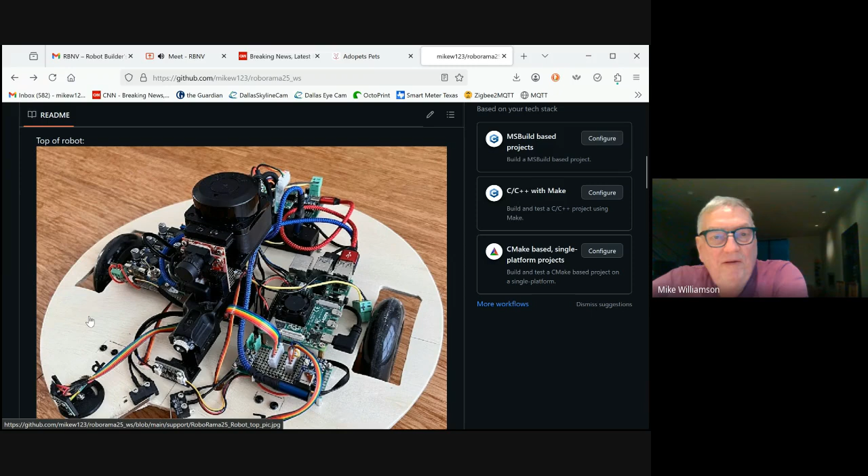Here's a power supply module, and this is the Pi, and then the wheel controllers back there, and the sensor controllers here, and then I got a camera and a LiDAR. I plugged those into a powered hub, which gets powered by the power supply, so it loads the Pi.

Then I got my laser pointer to be able to see what's pointed to something straight ahead of me. So for testing, I put a can right there and test it out.

I have tucked away under the bottom here an IMU, and then I have my current sensor here, battery sensor - voltage and current - and I have a single point range detector. It's a VL53L4, and it just sees what's in front.

Right here I have the two sensors - they're both 45 degree sensors on here, which are 8x8 each. I mounted them 45 degrees relative to each other, so it becomes a 90-degree sensor. I got one on both sides, and they point out, so it gives me a really good range for low-level obstacle detection. The range right here is taller than the cans, so it's going to be for localization, and then these are going to be for obstacle detection and to help maneuver into a can.

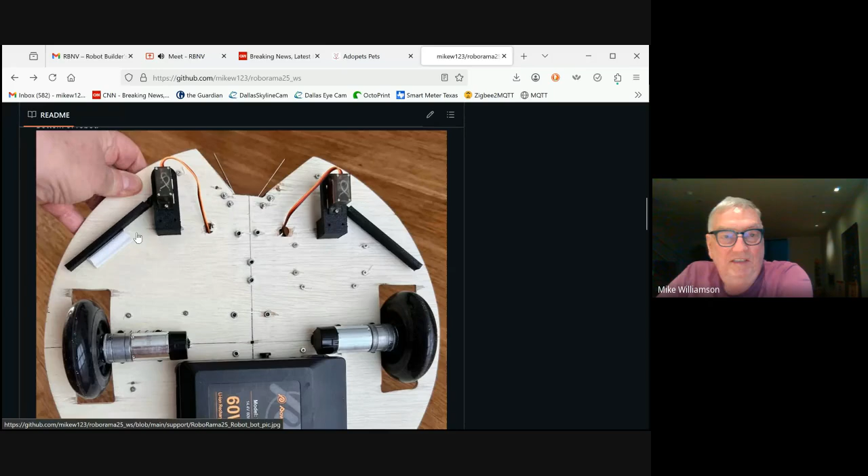And then the can - this is the limit switches to know when the can's been grabbed. And of course you can see the wheels. The bottom here is the servos, and then these are my grippers - they close and pull the can into the limit switches, into that notch there. And then I have the motors and the wheels, and then the battery and a caster. So that's basically my hardware design.

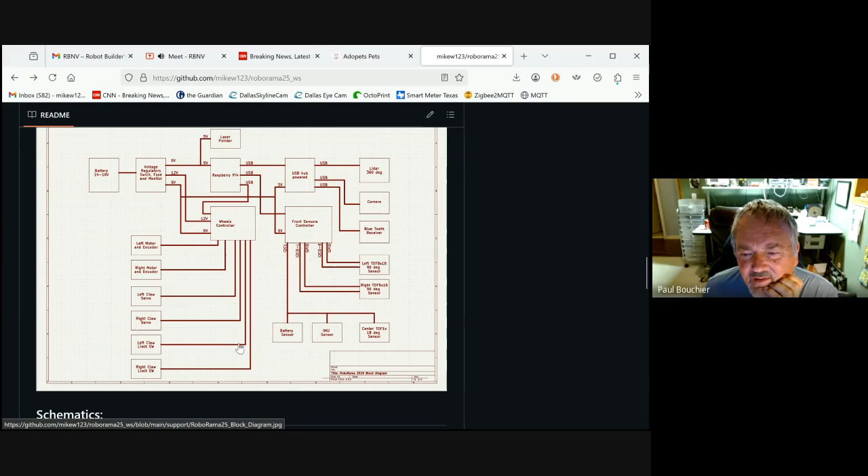I've shown it before, but this is nice pictures, and it's in a document. Oh, nice. And then this is like a schematic of the electronics - a block diagram.

Where's the Arduino in this diagram, Mike? Oh, the wheel controller and the sensor controller - it's an RP2040, but I use Arduino IDE to program them, so their code's stored under Arduino. So there's two of them, the front sensors controller and the wheel controller? Right, yeah, that's this controller here - it's that little module underneath that wire, you can't hardly see it. It's a Waveshare RP2040, which is tiny.

So basically here's the power comes in from the battery. It's about 14 to 15 volts. And then the voltage regulator brings it down to 12 volts to run the motors on the wheel controller.

And then a separate 5 volt regulator output for the Raspberry Pi. I put the laser pointer on there too. These are like USB-C connectors coming out for power. That one had a USB-C for power, and this one had a USB-C for power.

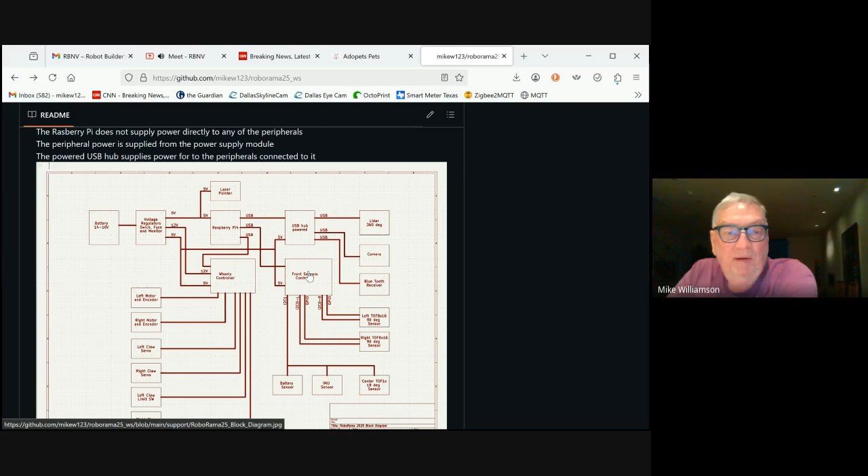You do a nice job of your documentation, Mike.

So these are the things that hook up to the wheel controller: the left and right motor, the left and right claw, and the left and right limit switch. And then the sensors: there's the left 90-degree 8x16 sensor and the right one, and then the center sensor, which has only an 18-degree spread, and then an IMU and the battery. So that's what I was talking about before.

And then this was a schematic for the power supply board. So basically the power comes in, a switch and a fuse.

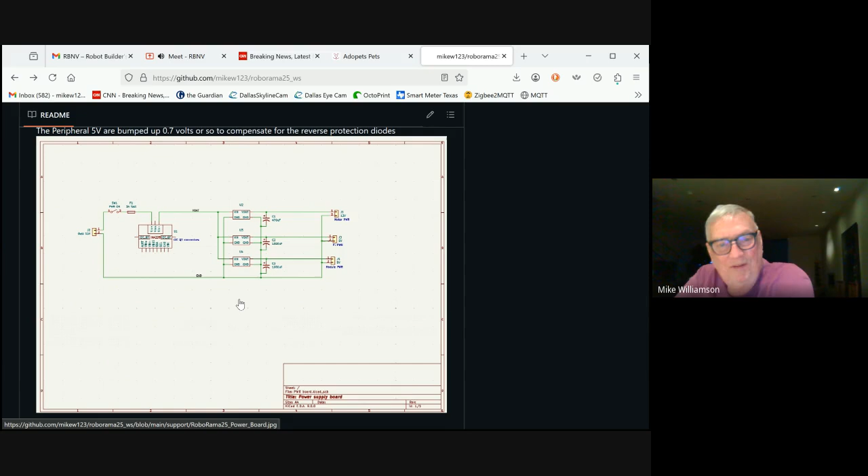It has a current and voltage sensor, and then it goes to the 3 regulators, and then I put more capacitors on the output of them, and then I put them on 3 connectors. So it's a pretty simple board, but because the regulators are big, it's a big board. You can see at the beginning that it's about the size of a Pi or something on this side.

And then this is the sensor controller board. And what I have it sort of described up here.

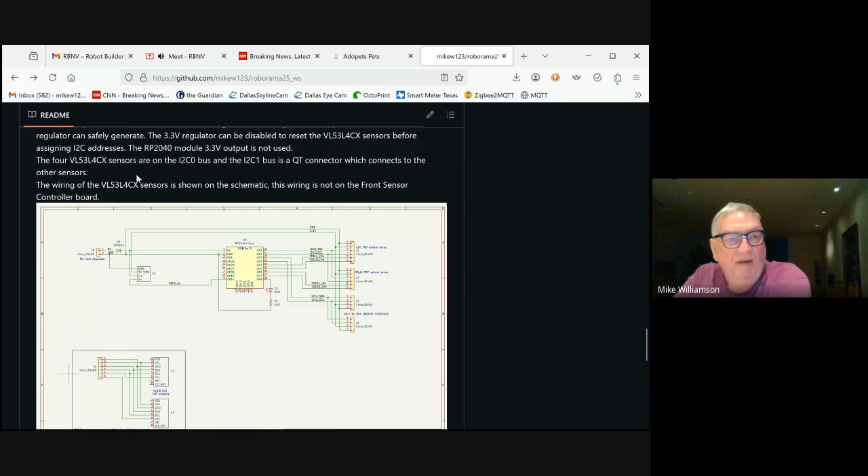It's the RP2040, and the 5 volt comes in, gets reverse voltage protected, so that the 5 volt from the USB cable doesn't feed into the other modules and stuff. It's pretty important to do that.

And then I have a 3.3 volt regulator on here because these sensors take a lot of power, so I couldn't use the 3.3 volt output of the RP2040 board. And so this one powers all the sensors. So it's good. And then this is just the connection to the connectors.

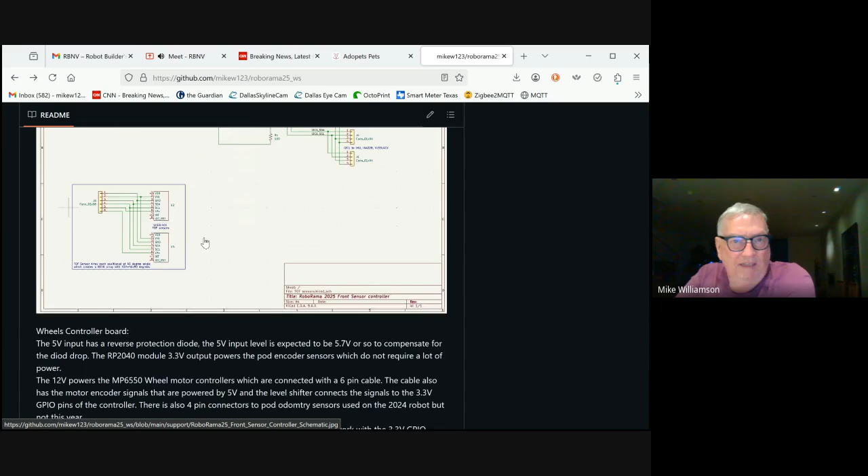And then this is the wiring harness that goes to the 2 left and right sensors. And since they come up default with the same I2C address, there's a... I'm not sure if I can pull this up or not, but there's a... it's not letting me blow it up very well.

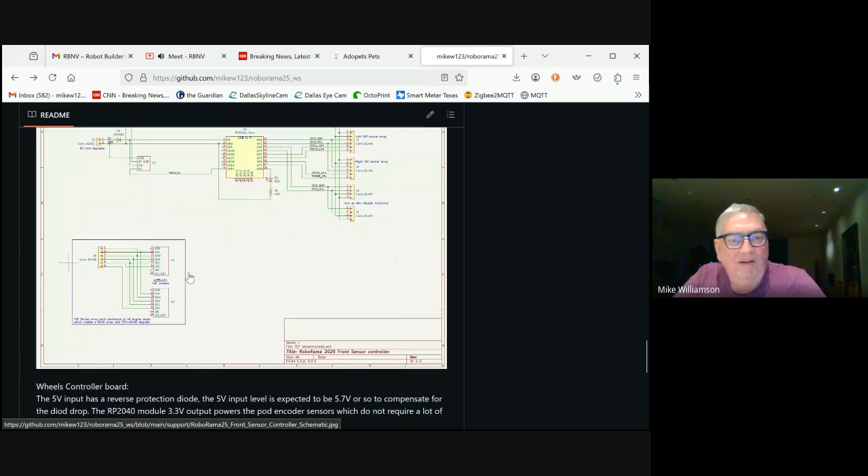Okay, so there's an enable for each of the 2 boards. So when it comes up, all the boards are disabled, and the power supply regulator here gets shut off and shut back on, and that resets the internal sensors to their default I2C address, and then I cycle them up one at a time to set their particular addresses based on that wire.

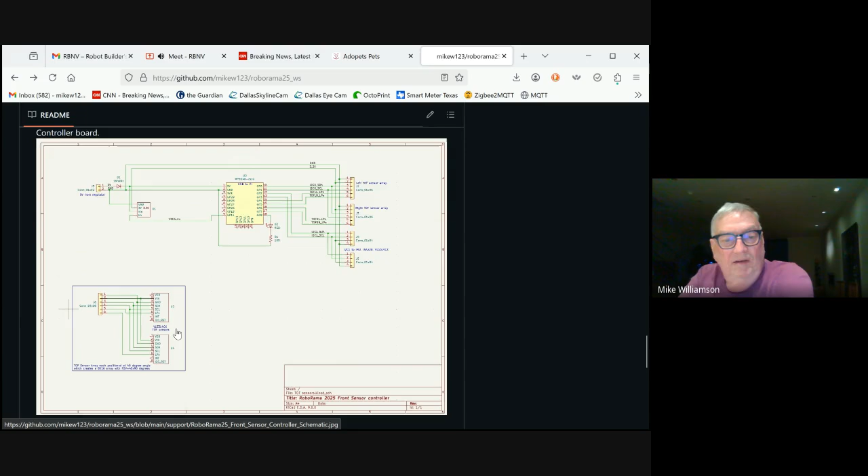And then this is the wheel controller. So basically it has the RP2040, it has 2 motor drivers, and then it has a level converter.

And the level converter was because the encoders on the wheels really didn't want to get down to 3.3 volts. They say they'll work, but I didn't trust them. So I ran them at 5 volts and did a level conversion to get really nice, clean, sharp edges out of them.

Yeah, and then the RP2040 has the PIOs on them, so they make really good pulse width modulation for driving the motors, PWMs, and then they have some really good code for those PIO modules to do the PWM driving of the servos also. And the PIOs also have good detectors on them for doing the quadrature detection. So all that's run in hardware on the RP2040.

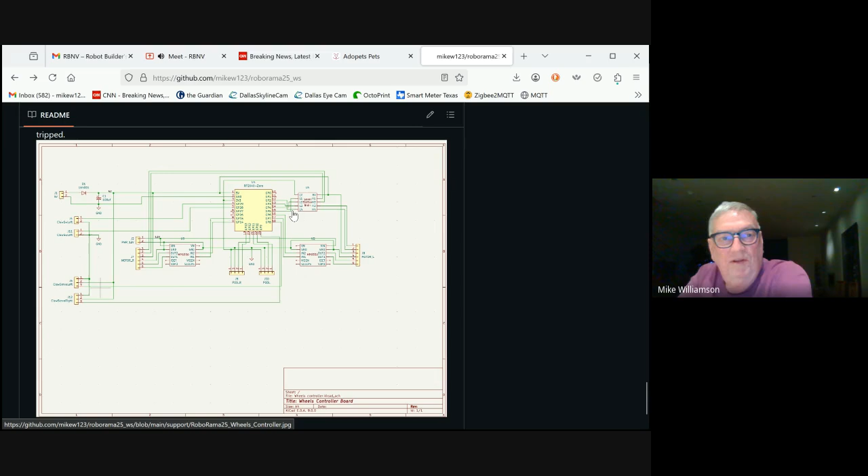That's a good idea, so that's pretty good. So that's my README file. Need to add more information to it and keep it up to date.

Is there anything on this README file of interest, or?

Just Mike, one question. I notice you have a separate Bluetooth transceiver. Is that correct? The receiver, that's for the game controller.

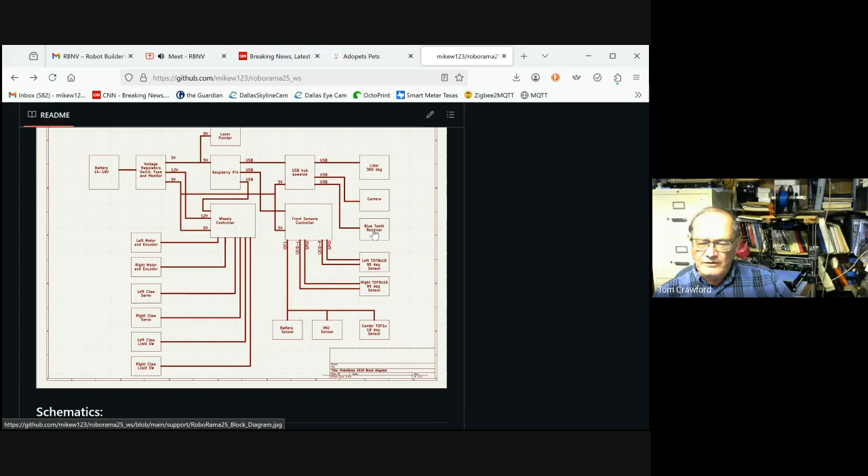So for the joystick, does your Raspberry Pi 4 support Bluetooth, and why did you choose not to use it? The game controller came with a little dongle to plug in, so I just used it.

Okay, so you had it, so you used it. Yeah, got it. That way I didn't have to program it or anything, so I just plug it in and it's happy.

And then the ROS Joy module knows about it, and it can decode it and send information to the ROS system for teleop.

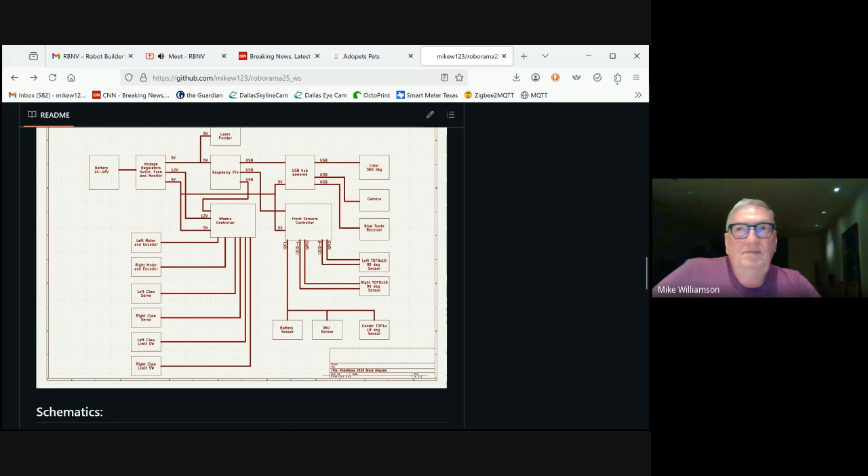Right now my robot's down in another room. Today I moved to another room because I was building the course to do debugging and testing in a room I'm not using, and I'm realizing it doesn't have good Wi-Fi, so I've got to figure out how to fix that. It's pretty unreliable between the Linux development machine and the robot, the Pi Wi-Fi on the Pi. One end of the room it's okay, the other end it's just not good at all.

Once I got my LiDAR running, I was visualizing it in RViz, but right now it's not working that good because of the Wi-Fi issues, I think. I was noticing that in RViz the LiDAR was being flaky. All the messages were coming out, but it would say it can't transform it, and every once in a while it could transform and stick out a message.

I made a change where the transforms between all the links - I need to put that in the documentation, the ROS structure of the different transforms, from the LiDAR to the base link, to the map, and to the ODOM - I updated the transform rate on those broadcasters to be the same rate as the LiDAR, and RViz seemed to work a lot better.

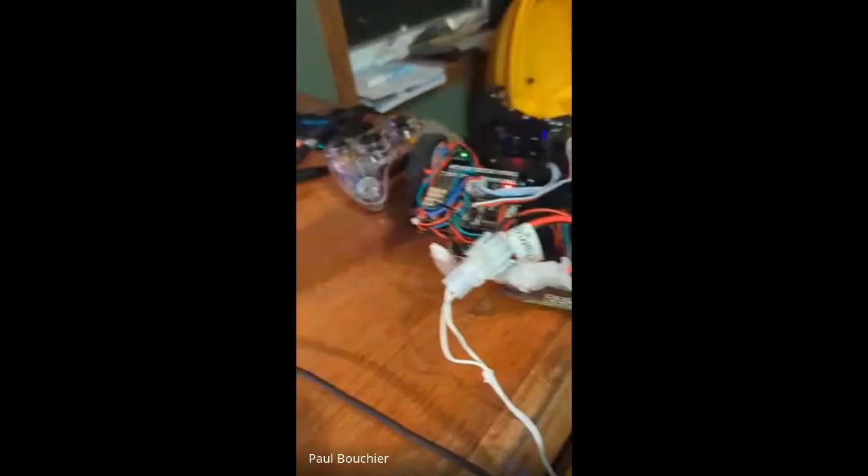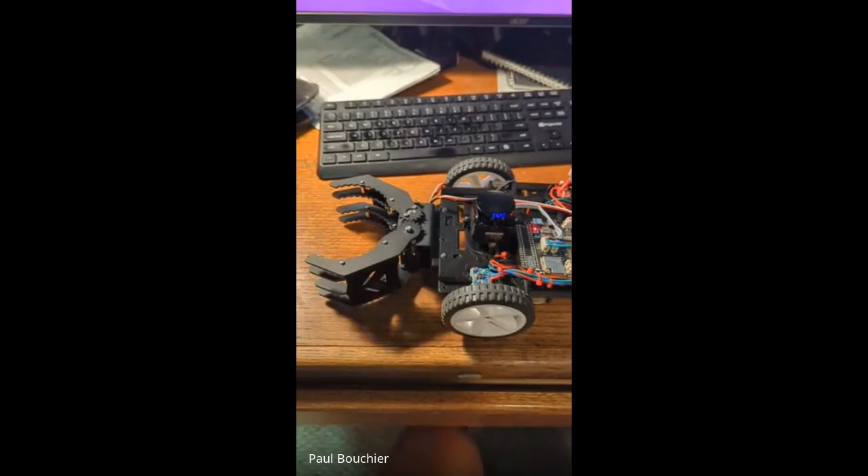You got an echo going again. Yeah, let me see if I can mute this. There we go, mute. Is that better? Still got a bit of an echo, don't I? They're both still on. You want to not mute the phone, but mute the PC camera. Yeah, looks like the camera. Otherwise it won't show up in the recording. Okay, how about that? That sounds better. No, you got to do it the other way around. You want to unmute the phone so it can show up in the recording, and then just mute your PC. Okay, so like that. That's better, okay.

So I modified the linorobot stack to accept a command onto the servo, and so if it issues a publish command - so there's the can grabber.

Operating, and your grabber's fancier than mine. There we go. So is it a can grabber or a can crusher? Well, good question, it's really only a grabber.

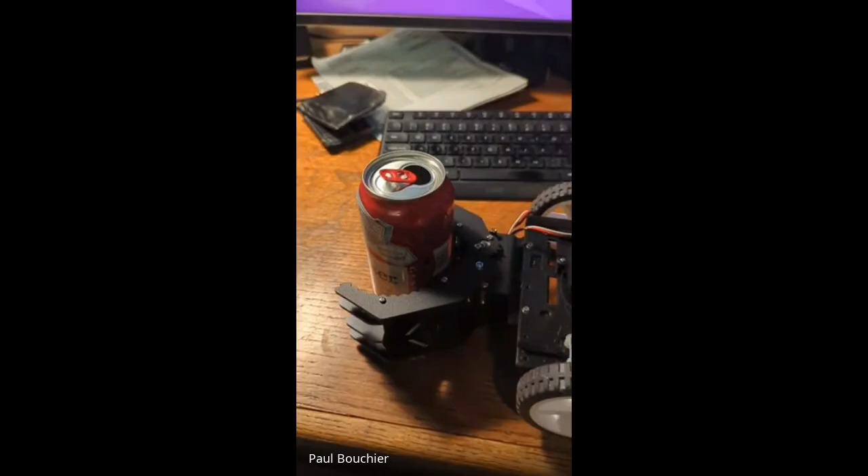Wrong way. Hold my beer, here we go. Maybe a grabber - there, oh there we go. Like a rat trap, it didn't crush it though. It's tight. Yeah, my servos seem to buzz when I grab too hard.

Yes, that's what I was going to say - you should adjust the angle that it closes at, because if you don't, your servos are constantly trying to get there and they'll overheat. Yeah, I noticed on my battery sensor I was drawing an extra 300 milliamps when I had both servos buzzing. Yeah, you don't want to do that. Right, they have to reach goal.

Okay, and then the other thing that I wanted to share - just bring it up and let me put the robot out here. So you got the hallway set up, and okay, I'm going to - hopefully this will come up - come on baby, come to life.

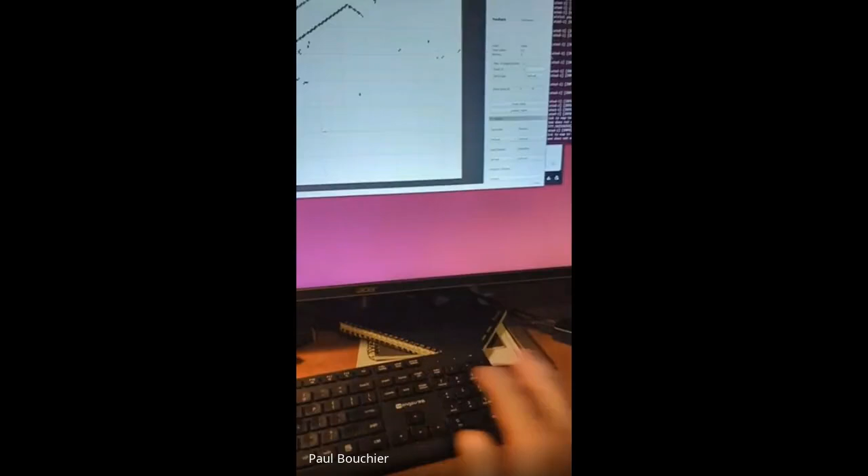Okay, and I'm going to share this window. And you should be seeing the RViz window, and I'll set - you got to give this thing an initial pose estimate, and you can reposition it as you see the need to.

So, looks like it's been wandering all over the house, not just the hallway. These are various points that it picked up when it did a SLAM, when it mapped the hallway using SLAM. So now you guys are seeing the RViz window, right?

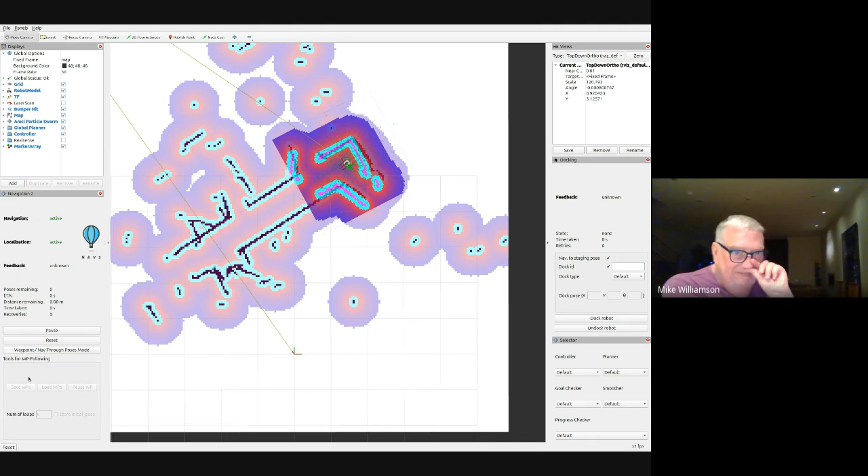So now I'll do waypoint nav through poses, and set a pose - nav to goal down here, pointing back up the hallway in the opposite direction to which it'll come from, and then set a second pose back where it is now, pointing towards where it should go, and then set it to do 2 loops. And if I'm really lucky, this will work. Start waypoint following.

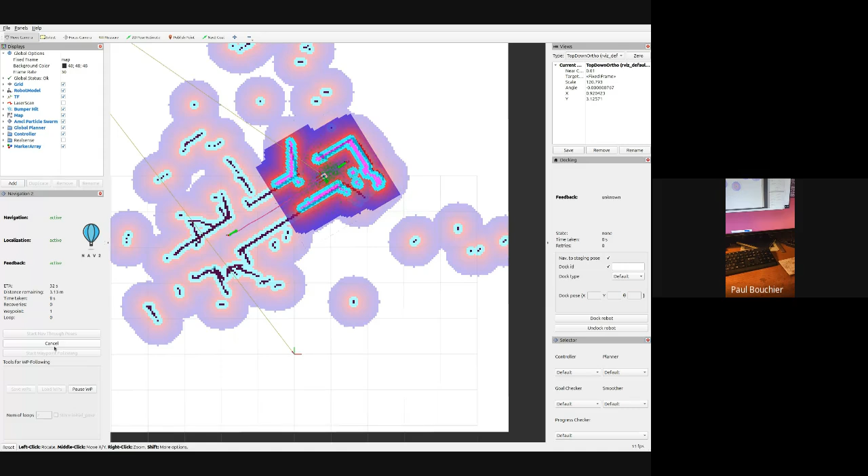And you guys are seeing the robot in the hallway, right? I see it on RViz, but not on your phone. Your phone looks frozen. It's showing your keyboard still. Now we see it, there. Must have been slow to catch up.

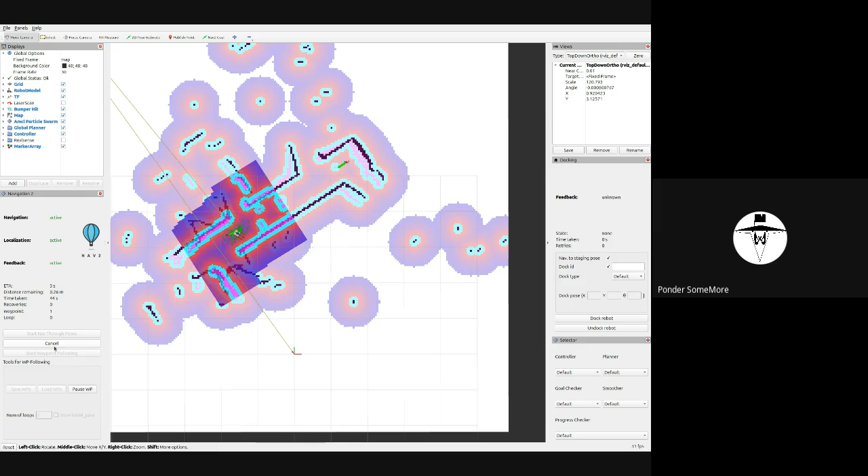Okay, so you're seeing the robot doing a turn now? Yep. And if you look at RViz, you'll see where it is in the map.

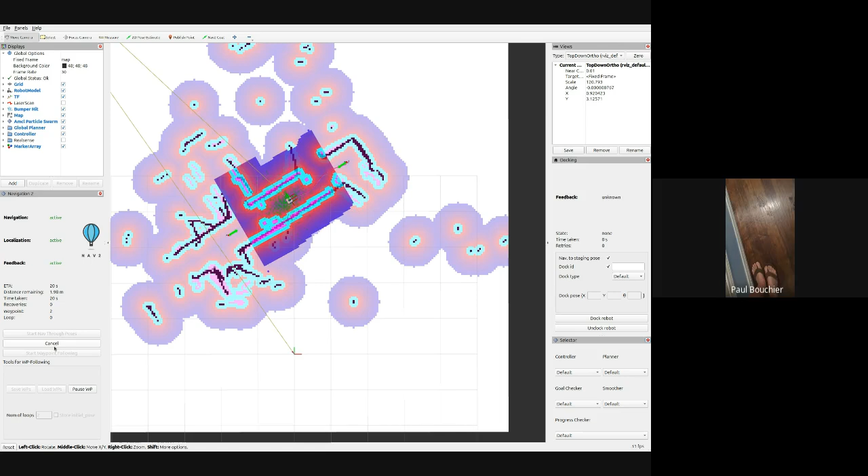So I set up the cans so the path kind of wanders around. I'm just going to stand here, and it should modify the path. The local planner should modify the path to avoid my feet, which it does. You can see it's going around me.

Thought we were going to see a toe crusher. And it's doing its little back up and turn movement.

And you'll see if you look at RViz, you'll see it detect the obstacles. It's not to a point where it's detected the far set of cans yet, but it's getting there. And you'll see the path on RViz change as it figures out a new route.

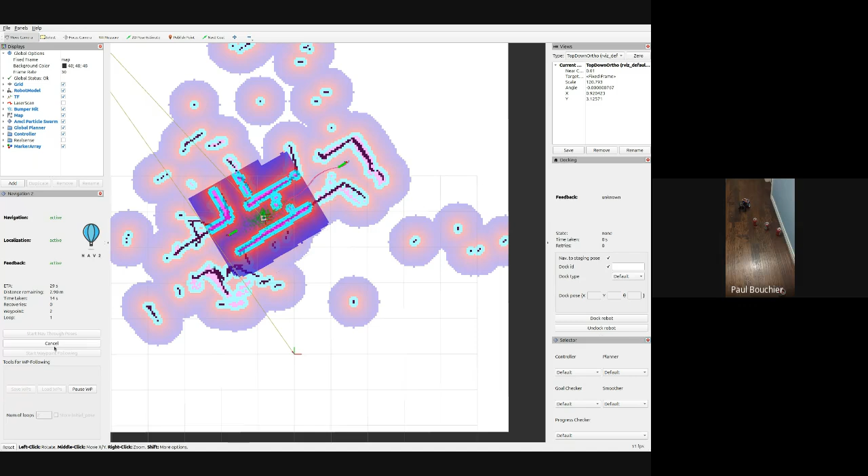So now, what would happen if you made it go like twice as fast? Can you make it go faster? Okay, I'm just moving the cans to give it an obstacle. Now it's replanned around a new can location. I've got the speed turned down because I thought that was maybe causing me grief, but it wasn't.

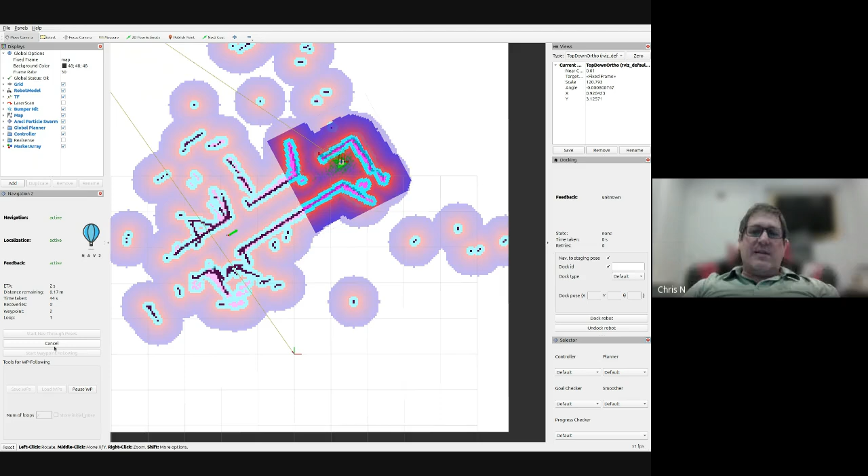It should go faster, but I just haven't gotten around to trying it. The reason I'm asking is last time, I haven't used it on ROS 2, but on ROS 1 with the nav stack, I've always found that I wasn't able to make it go fast. I don't mean really fast, but I wasn't able to make it go faster than that. It always wanted lots of free space. I couldn't tweak it so that it was okay with more narrow passages, those sort of things.

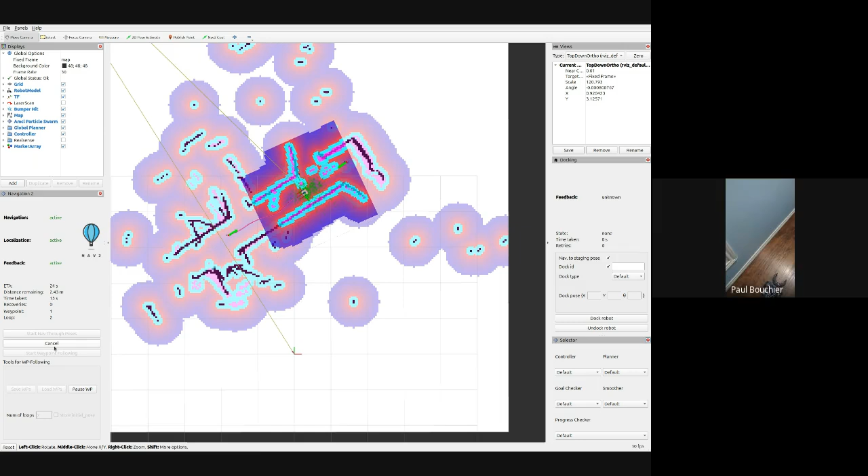So I can see how narrow I can make its passages. It does pretty good, it'll come within a couple of inches. Oh, that's too close. It thinks it's detected a collision now, and it's trying to recover.

Yeah, isn't there a minimum distance for the LiDAR? Like maybe 50 millimeters or so, maybe longer? I wonder if it's running into that as a limitation, if you get things too close, you just can't see it. No, the LiDAR will detect stuff that's right up there.

It seems to have gotten stuck. Claustrophobia, that's what it is. It's pouting. So, thanks for the demo, Chris. All you got to do is kick it.

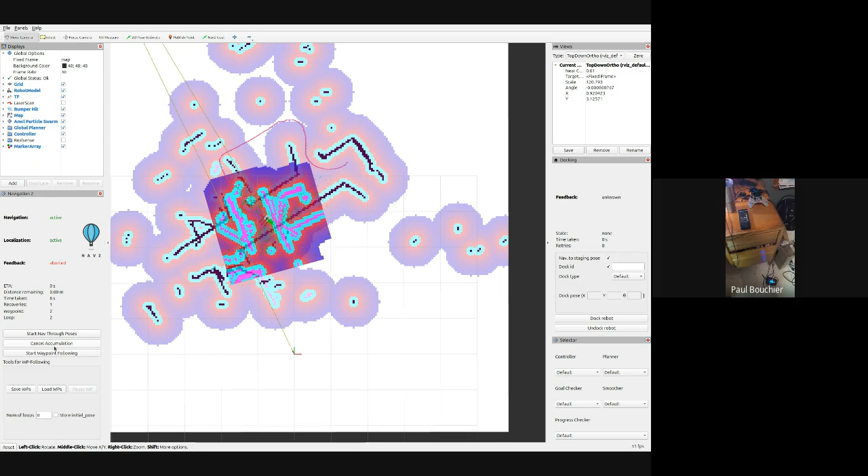Let's see if there's an error message that makes sense. No. Cancel the goal, cancel the goal because it figured it couldn't get through there. Oh, I see what happened. Okay, so at some point it lost localization.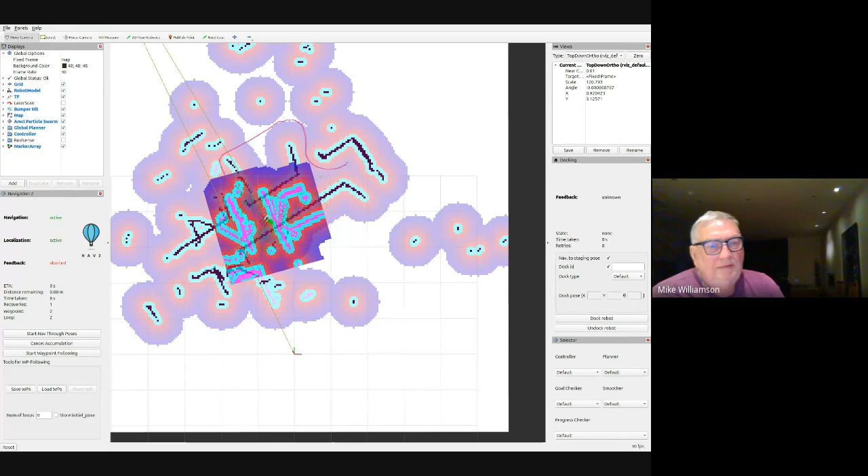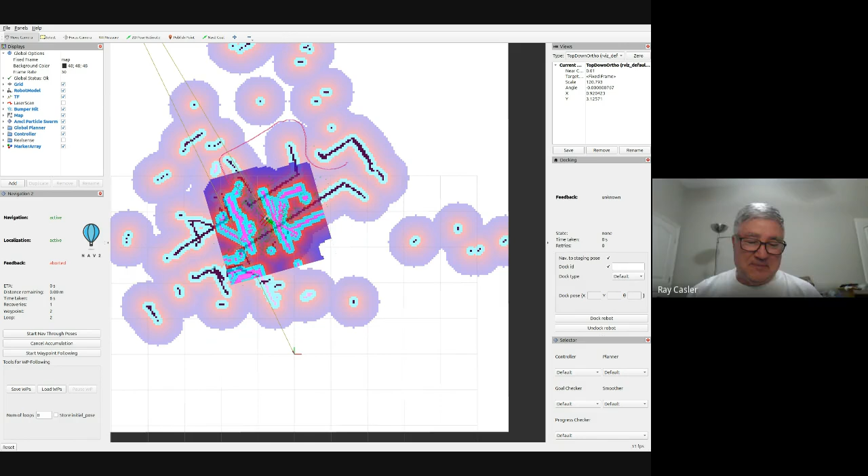Yeah, we can't hear you if you're saying something, Paul. You're still on mute. We can all hum, do do do do. Can you hear me now? Yes. Can you hear me now? Yes, I can hear you. Okay, I think I'm back now.

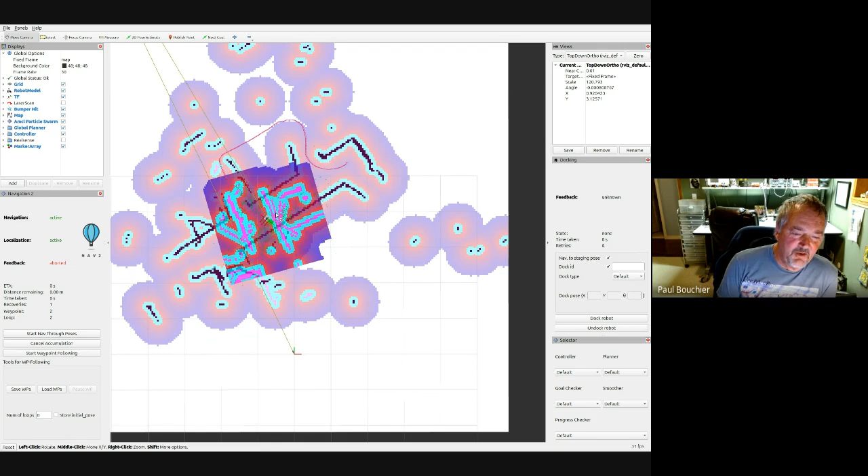Sometimes it does this. Can you see my cursor on the RViz window? Yeah, so you see where there's this line across the hallway. At some point it lost localization, and I've noticed that happen now and then, and I haven't figured out why it happens, but the odometry frame got turned around, rotated relative to the map frame.

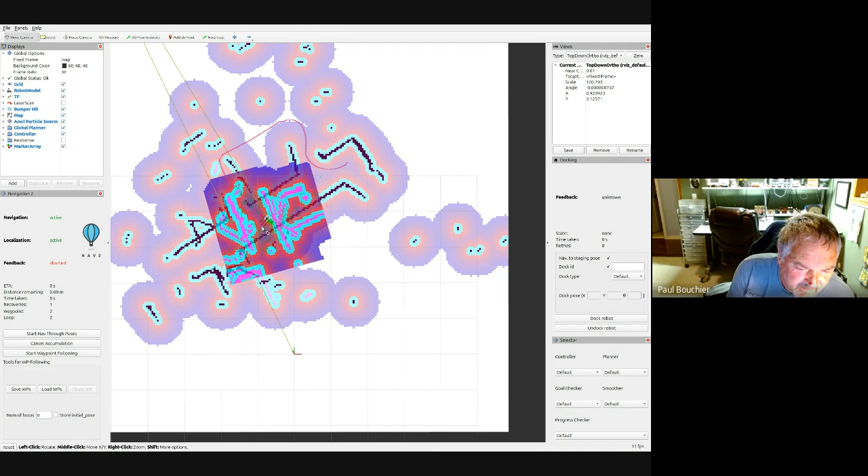So now it thinks the things the LiDAR is picking up look like obstacles placed across the hallway, and it shows that the robot is pointing about downwards and to the left. Is this what Chris was talking about, if it goes too fast? I think this is what Chris is talking about, and it's actually pointing downwards and to the right.

So I can reset the pose estimate, and hopefully that will all come back to what it should be. I'm trying to tell from the LiDAR image when you got it lined up right. There we go, so that should be enough to let it continue. But maybe it's too far gone.

We'll cancel, accumulation, and set a nav2 goal. It's not far from it. There we go, so now it's recovered, and yeah, look at that. That's exactly the problem, and I don't know why it does that.

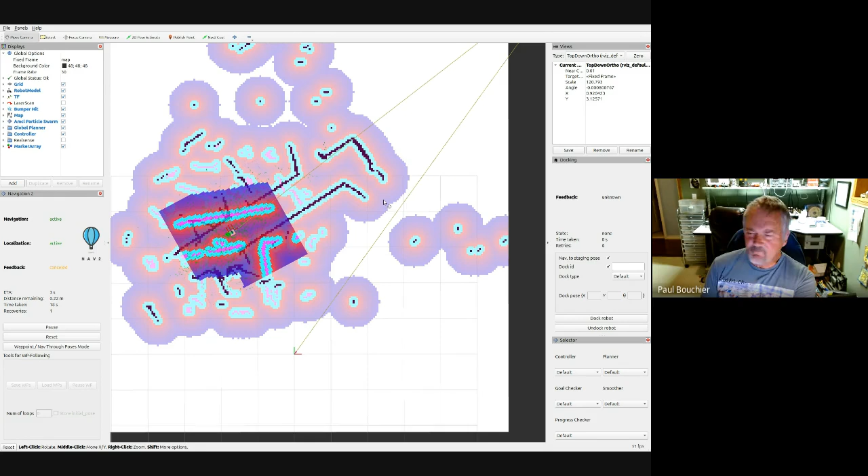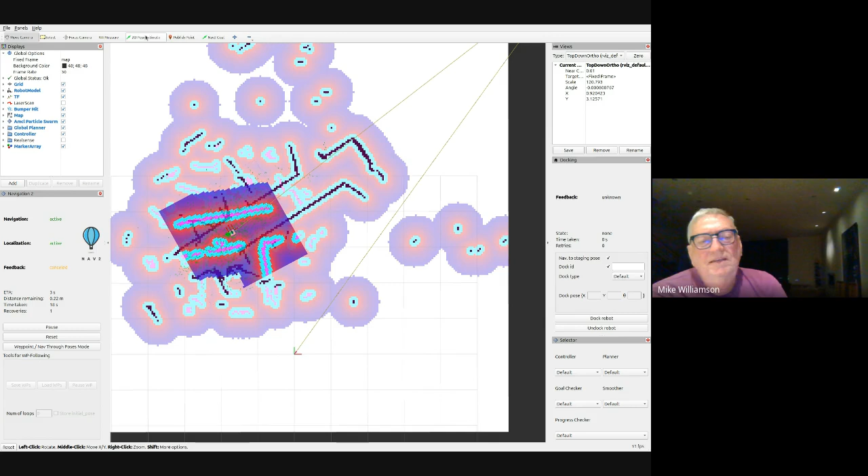I know one of the things that was causing it was I get dropouts on the Wi-Fi between the ESP32 and my laptop. Yeah, Paul's doing the actual heavy lifting on the laptop and not on the robot. So it's actually pointed up in this direction, best I can tell.

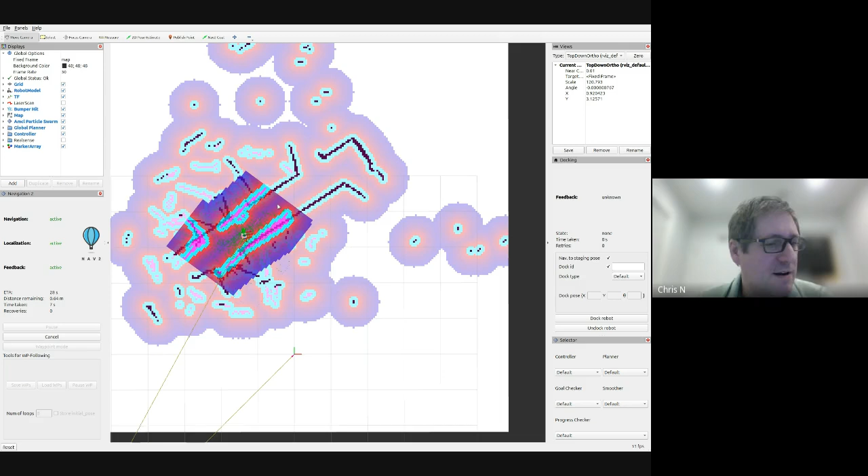How good is your time synchronization between laptop and the robot, Paul? That's a good question, Chris. Mike, before recording started, you were talking about some issues with your LiDAR and RViz. I've run into issues before when I have things going on the robot, like on the Pi, and other stuff going on the laptop, including RViz.

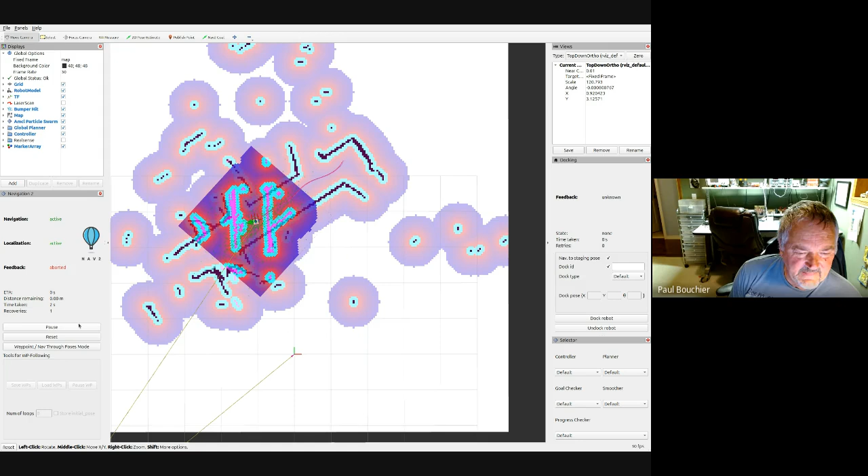If those were not perfectly time synchronized, things just were not happy. I used to get messages like, oh, you can't interpolate into the future and this and that. You had to really be spot on with your time synchronization. Yeah, I was getting those even on the robot itself, not going between two different operating systems. But that was last year.

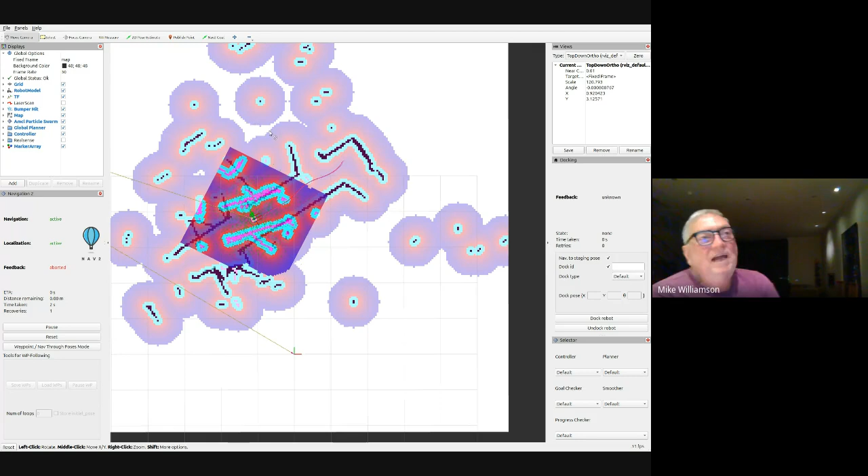This year it's given those issues on RViz. But last year I was trying to do transforms on the robot between stuff, and it would tell me I can't do it. That's when I said, okay, I'm going to not timestamp anything, and then things started working. So everything's zero time. But I want to try to do it right this year with timestamps.

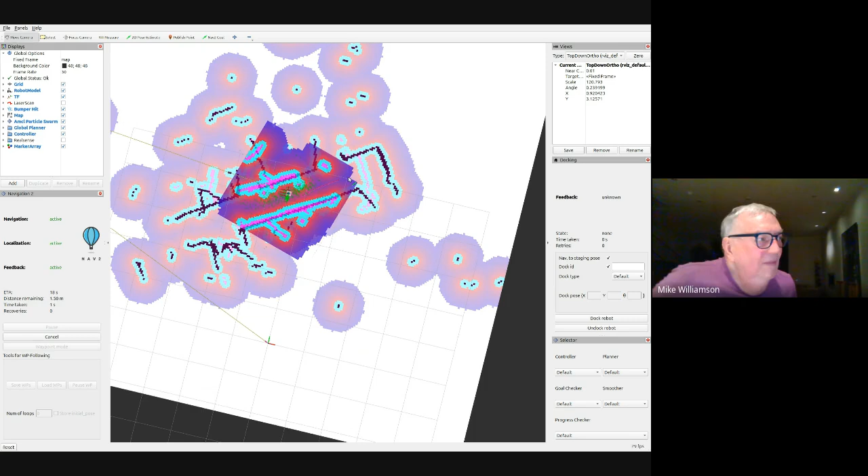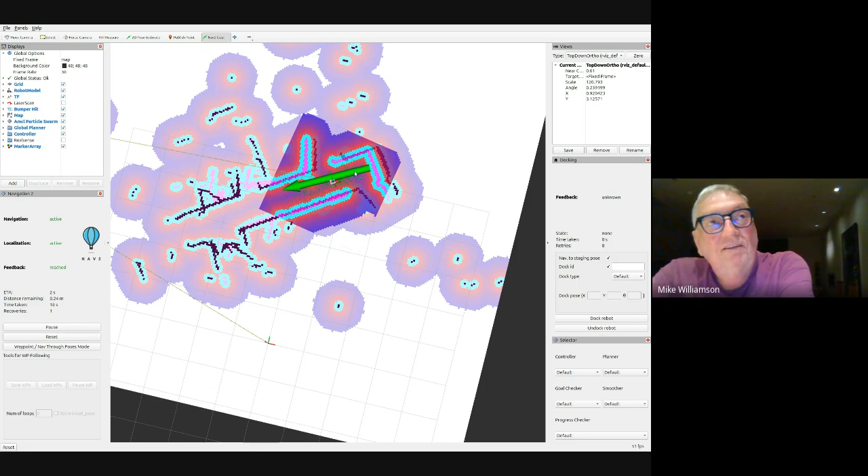Yeah, so last year I cheated. I wasn't using the navigation stack, I was just making my own up. But mine had similar issues with losing localization, even with my own code. That's why I didn't win last year. All three of my chances, it lost localization, went wrong. And then before and after the competition, it kept localization.

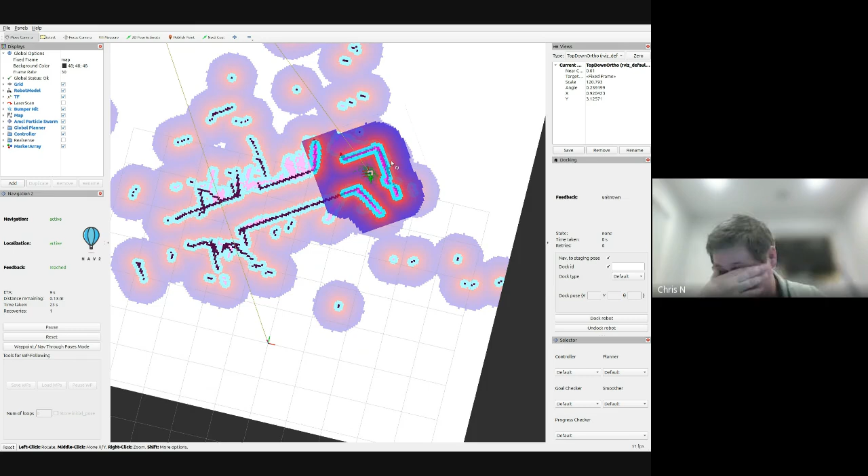And it's like you can see it trying to fix its localization, and then it'll get messed up again. You're asking really good questions, Chris, and I just don't know, haven't played with it enough. That's the thing with ROS, right? How do you troubleshoot this sort of problem? It's such a big black box, you don't really know what's going on inside.

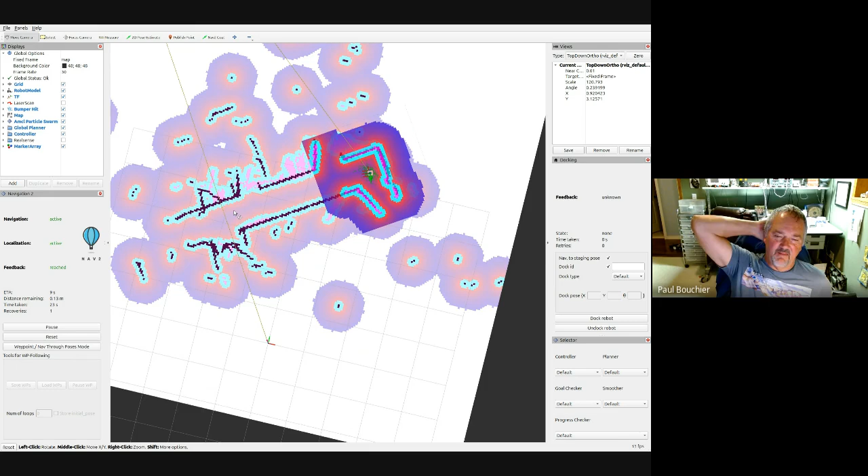Well, I actually found a way to troubleshoot it for one of the causes. What was happening, the Lino robot software on the microcontroller pings the agent on the laptop, and if it missed one ping, it would reset the microcontroller software and restart all the publishers and subscribers. This was happening every minute or two, so if the robot was moving at the time, particularly rotating, suddenly there was a dropout in data from the /odometry topic and also the IMU topic, and the extended Kalman filter would go crazy and produce nutty stuff on the filtered ODOM topic.

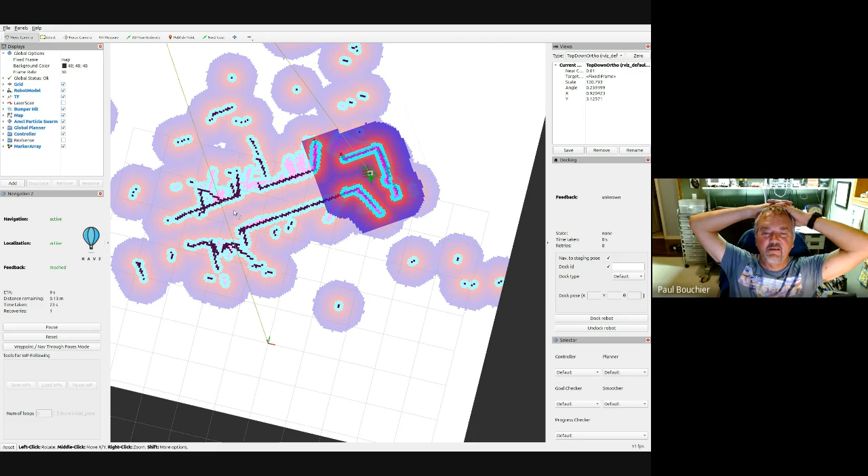Particularly the orientation would go all wonky, and that would cause the transform between map and base link to be all wonky for its rotation, and that caused the LiDAR to go all out of whack. So I found that by recording a bag file and graphing the orientation Z and W quaternion terms, you could see it do a jump.

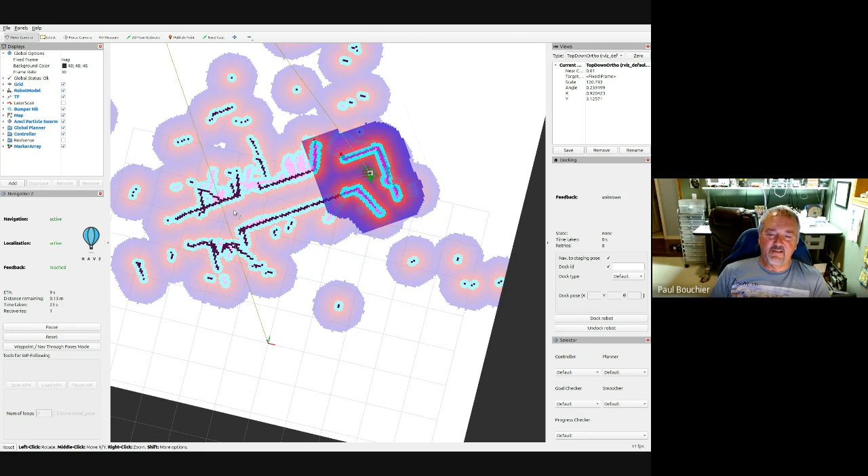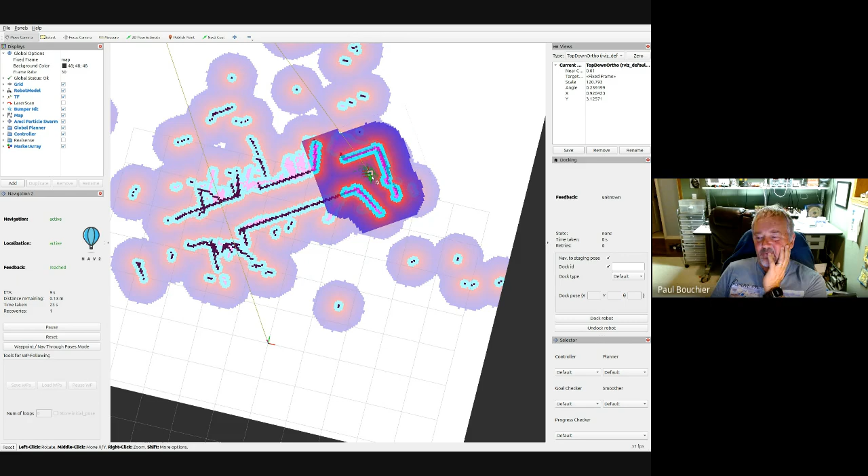And on ROS bag, you could see coincident with that, you could see it stop publishing ODOM. So that told me, hey, ODOM is going through jumps, and that's causing the map to base link transform to go all wonky. So I'm confident - I fixed that by making it more tolerant of lost pings. But I'm not seeing lost pings now, and still occasionally seeing this wonkiness like you just saw. So I don't know what causes that, still more work to be done.

Yeah, we know it can be done because my Roomba works pretty good. Yeah, right, my Roborock Q5 works real good. So yeah, I know it can be done, but I haven't had enough time to tune it up.

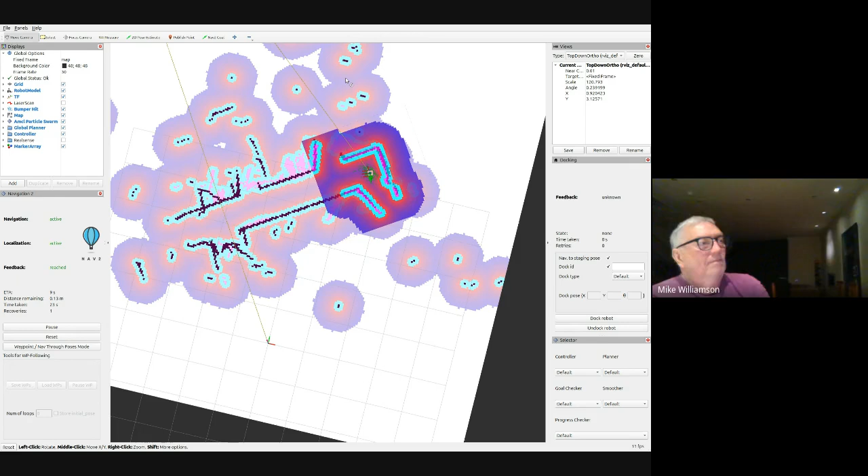So anyway, the talk on Saturday is not really about, well, here's a finished rock solid thing. It's about these are the nav2 concepts involved, and the Linorobot2 architecture, and how you configure it, and you can do this with actually zero programming, because other than the bug fixes that I put in, there was no actual programming needed to do what I just demonstrated. I've been given committer access to Thomas Chu's Linorobot repo, and I've put in a few fixes for things that were broken. So anyway, I reckon Linorobot is pretty good stuff, and that's what I had to show.

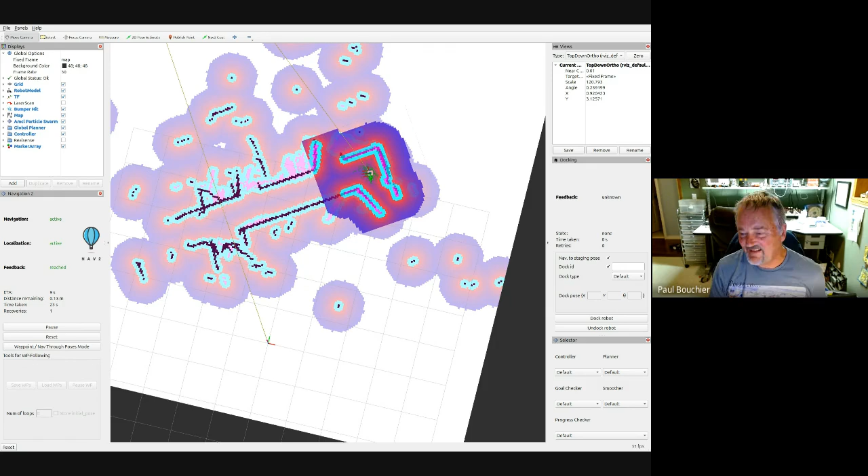You're doing pretty good. Yeah, anybody can get it to run in simulation, but in real life, it's a lot harder.

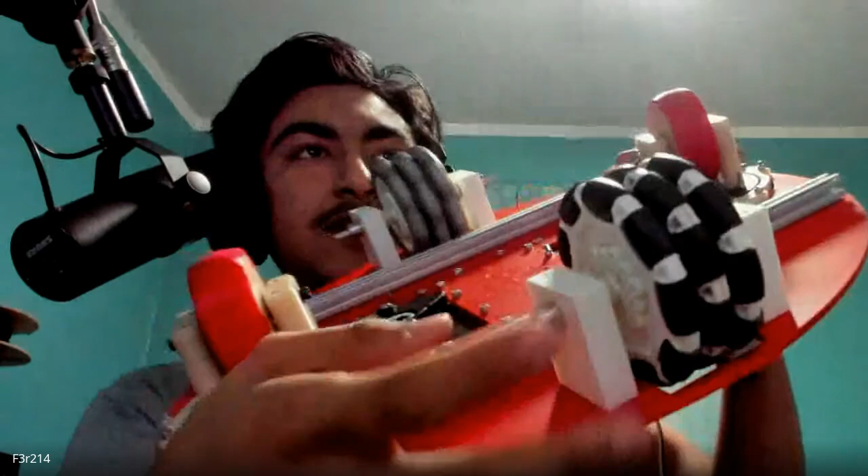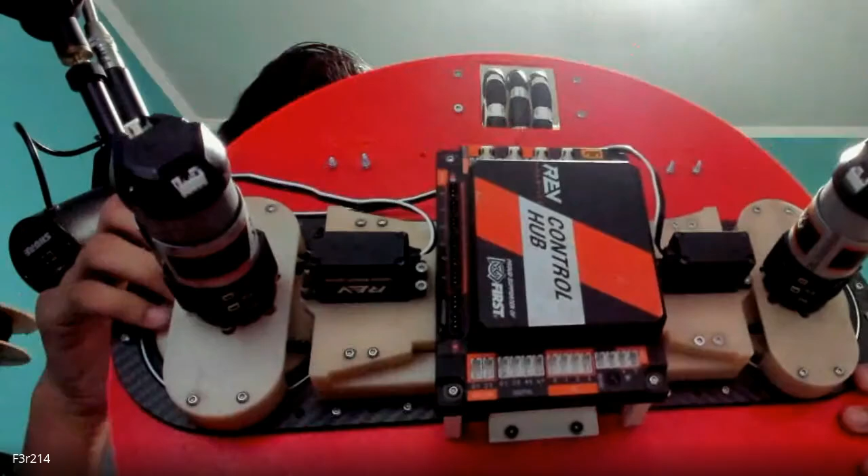Thank you, so about swerve. We built a new chassis for it. Now we have 2 pods instead of the single one we were testing last time, next to each other, parallel. Omni wheels still for supporting the edges with no swerve. Here's the top, the chassis is actually 3D printed. We split it into 4 separate parts and connected it together with the pods and the things holding the Omni wheels, as well as supporting extrusions in the back.

We haven't been able to test anything yet, unfortunately, since we still have to get code up and running. We're hoping to first use basic code like what we used for the single pod swerve, and then upgrade based on the Roadrunner motion planning library for FTC, changing it so we can use a variable amount of swerve pods, because we'll have to use 3 for a robot we've been trying to build for a while. So we've been going from 1 pod to 2 pods, getting our documentation done and seeing how each different configuration works.

Wow, that's really neat.

For future plans for the swerve pods, I'd say they work decently well as they are, but we do need to add extra tensioners here for the belt, since the steering is belt driven. We need a way to make sure it's more fixed, because these can still slip a little bit, especially after a lot of driving.

And then here on the bottom, we have no actual way of indexing where the pods are. So if there's some kind of slippage, we're tracking the rotation of the steering, but we won't actually know if there's slippage.

So we're planning on doing some kind of sensor, probably like a touch sensor - or what's used on a typical 3D printer, like an Ender, the switches at the ends where its limits are. A limit switch, yeah, that's the word.

Yes, so here is a through-bore encoder. How it works is the whole pod turns, and that turning is controlled by this servo - you can see it on this one. The pulley is connected directly to the servo, and there's this axle that connects to the pulley. Whenever this turns, you can see that the axle and the encoder turn.

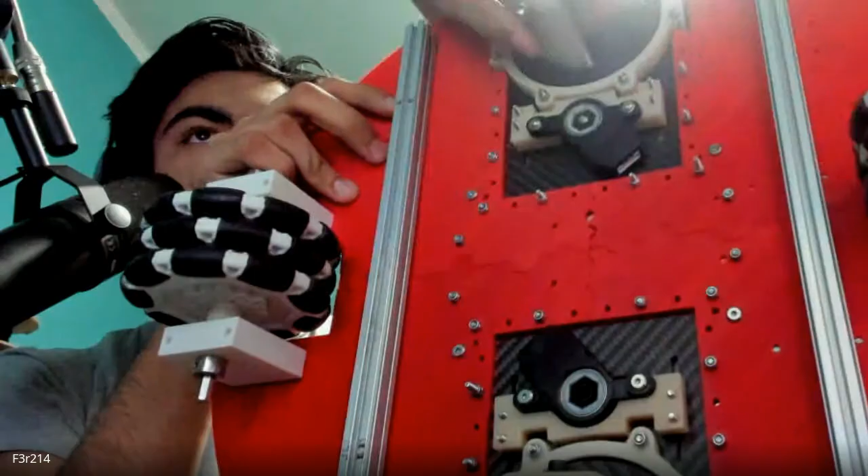And then, do you have encoders on the wheels to know what their position is? Yeah, they're built into the motors. Here's the port for that.

So what kind of slippage were you referring to before - was it the swerve wheel on the surface? No, that had pretty good traction. It was the chassis - we had no control over the rotation of the chassis since it was just one pod, and then the Omni wheels on there were the ones determining that, but it was random. They would sometimes slip or skip because how they were mounted was pretty inefficient, and the extrusion they were mounted on would have contact with the ground, causing issues with the driving.

Oh, okay. Sorry, did you mean slippage as in what I meant for the actual drive belts for the steering? Yeah, I wasn't certain what kind of slippage you were talking about.

So your belts are actually slipping, like skipping teeth? We're just being cautionary for that - it hasn't happened yet, but it's possible that this whole unit here, which has the servo and steering components, can move forward in case the belt loses tension.

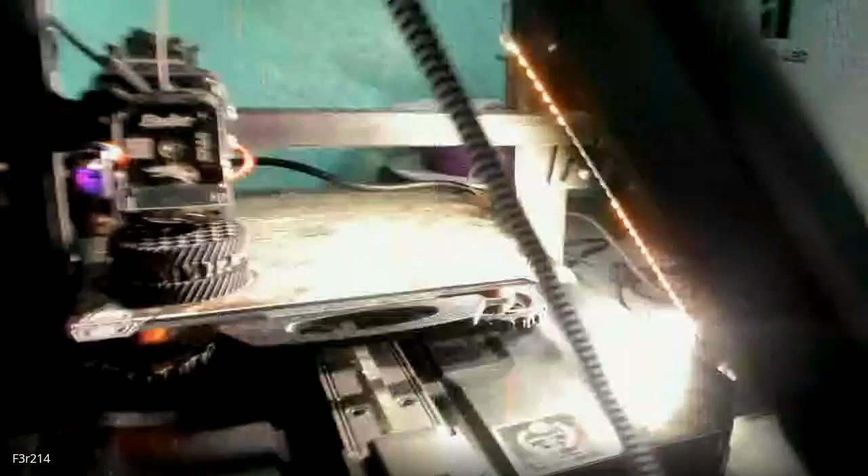So this one's a personal project. Last week I said I was under the assumption I had bricked my Ender 3 when trying to upgrade it to Klipper. However, I was just not looking carefully enough, because it turned out that instead of using the LCD screen, now you use the whole web interface, and the LCD screen just doesn't work unless you do some extra install onto the printer firmware. So now I have it up and running again, and right now it's printing a helical gear for another robotics project I've been working on, but I still need to do some tuning.

With the whole web interface, it's being run off of this Pi, and I can just control the printer from here - speed, acceleration, velocity, pressure advance, extrusion factors, homing. So pretty much everything that was on the LCD control, plus more, is now being done from up here instead.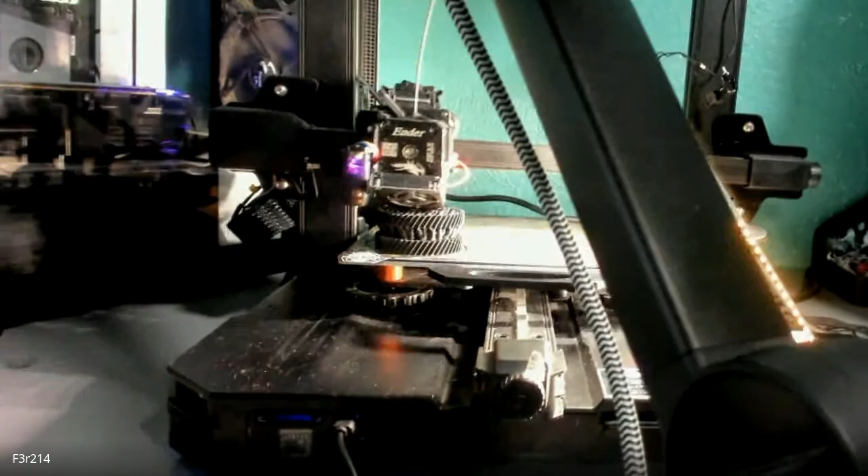Nice - that's a fancy Ender 3 setup you got there. Yeah, I believe I was doing that with OctoPrint. I think OctoPrint also allows you to view the thing, which Klipper might need something else for. OctoPrint has the benefit of monitoring through a camera built in. Yeah, and it can run Klipper. I haven't done anything in Klipper in a long time, but it just keeps working - cross my fingers. That was it, thank you all.

You're not using Protoneer or something on the Pi? Protoneer board - sorry, that's the manufacturer, Protoneer. No clue. Okay, no clue. The Pi is just running the web interface, right? Yeah, it's just dedicated to that and running that monitor.

I bet you were relieved when you figured out it wasn't bricked after all. Yeah. Isn't that the most sickening feeling when you think you bricked something? Yeah. Cool, all right, thank you all. Nice work, Fernando, thank you.

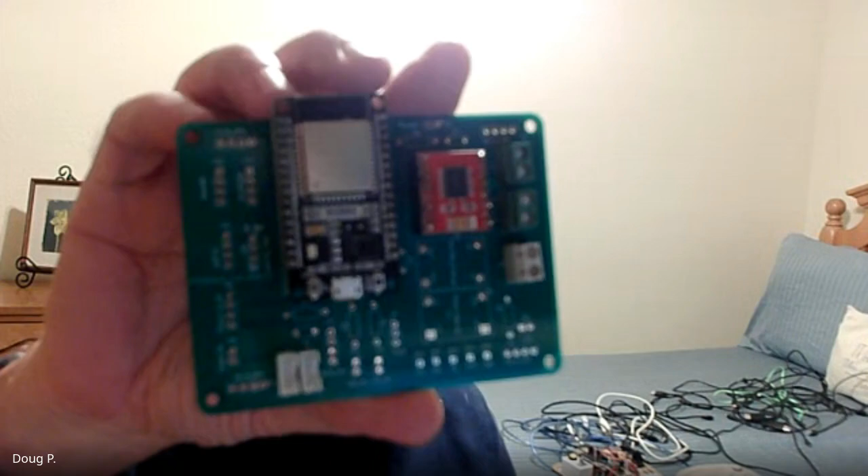Ta-da. It did come in, I'm starting to populate the board. So far I haven't found any wiring errors, but we'll see how it goes. So it looks pretty nice, I think it's going to be really cool. We'll see how it goes.

I'm hunting down - I bought a lot of buck converters online called Mini 360s. I've got buckets full of them, but I can't find them, I don't know where I put them. I think I even have two bucket loads of them and I can't find them. So that's holding me back a little bit, but eventually I'll find them. They have 4 pins that make connection - 2 for in, 2 for out.

You can get them in fixed voltages, or you can get them variable. Variable is the most common one, but I don't trust that little dinky open carbon potentiometer, whatever it is. So I've actually desoldered that, and I know the values of the resistor you have to put in, so I just hardwire them if I can't find one that's already made that way.

It's pretty simple. It'd be even simpler if I had done it with surface mount, but unfortunately the ones I have the right values for are actually through hole, so I have to kind of fudge them a little bit. But it's much more reliable than the little thing, because if that fails, whatever's hooked up to it gets full voltage. It's not a pretty fail.

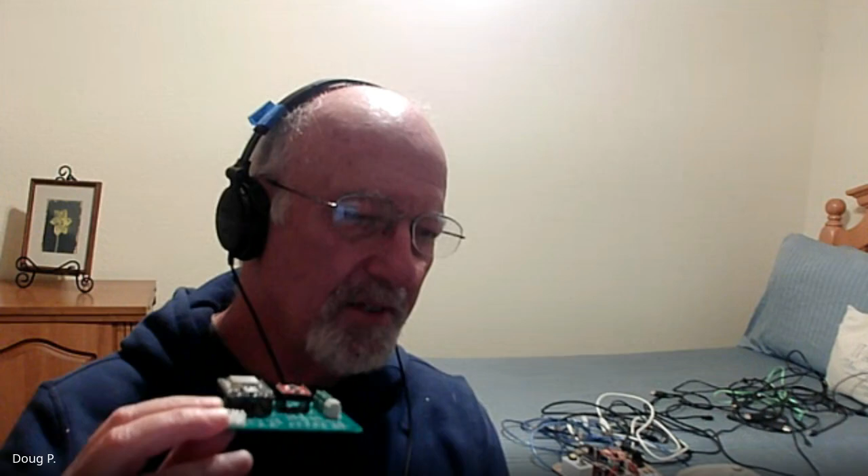Hey, can you hold that board up again so we can have a good look at it? I put in the driver, the motor driver, and the ESP32 module, but I haven't done my preliminary tests yet, so I just put them in there so it wouldn't be a completely blank board. Over here on this side, these are the two motor connectors, and that's the battery connector.

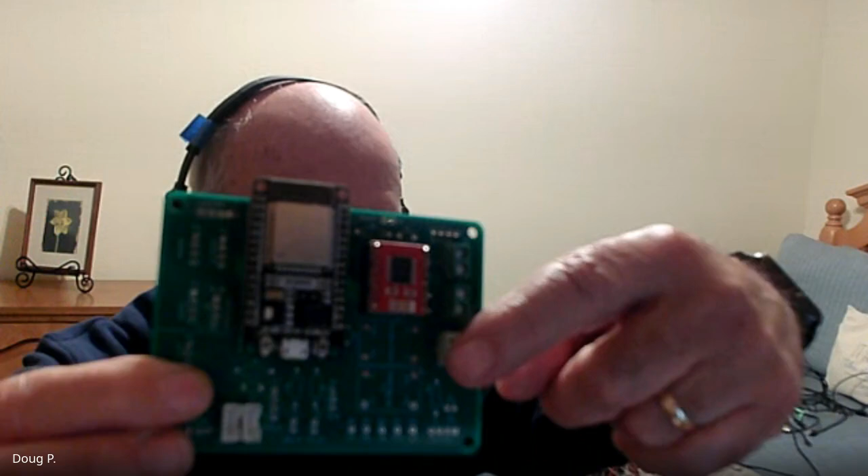Down here is the encoder ports. Then these, if you looked at the board, I don't know if you can see it. You're way too close for the focus on the camera. We'll probably see it better if you pulled it back a bit more. The silk screen has got everything labeled, so it's pretty nicely done.

Though you always learn something, so we'll see how it goes. Saturday, I might ask for a couple of volunteers and give out a couple, if you're willing to buy the parts. I don't know, we'll see how it goes. I might have some of them. Well, we'll see what we can put together.

Oh yeah, I put Robbie's head back together and tested its camera. What kind of face recognition are we going to use for feedback? I guess that's what you want to use a camera for. Well, for the camera, I was thinking we could maybe borrow on Tom's knowledge and use an ESP32 cam instead of that little USB camera, because all we need is one or two frames per second.

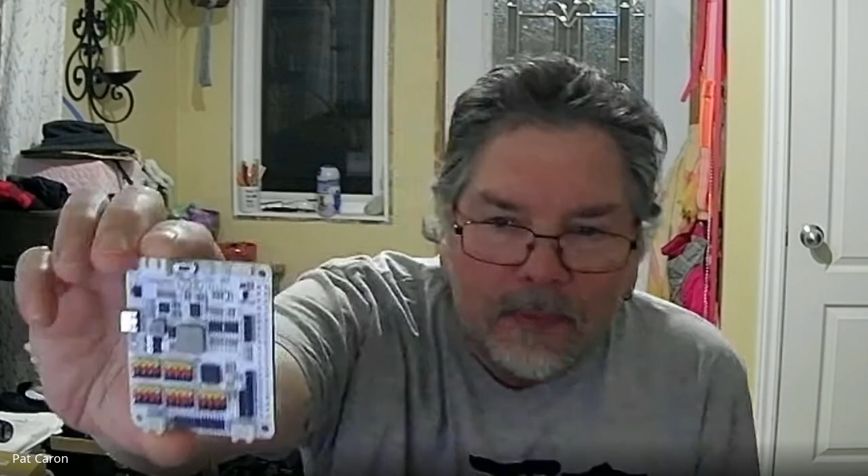I'm using it with a little Sunfounder robot hat, and reading up today, the 5-volt regulator is good for 3 amps. I'm running out of the Raspberry Pi 4B. So I'm wondering if I'm getting a problem with the 5 volts on the Raspberry Pi causing a bit of a voltage issue.

I'll tell you what, you might run into a problem, because what really sucks up power on the Raspberry Pi is if you've got peripherals hooked into the USB.

I have nothing but the hard drive. I'm running a little USB to SATA hard drive adapter, and a solid state drive. That's all I have plugged into the USB on the Raspberry Pi. You shouldn't be pushing it, 3 amps should be fine, I would think.

Are you getting low voltage readings? I don't have a monitor hooked up, so I'm not sure. Well, it's running headless on the Raspberry Pi, so you might want to just take a look. Open up the terminal and check for errors, you can SSH into it and see if you've got a low voltage. That would tell you if you're dropping the power.

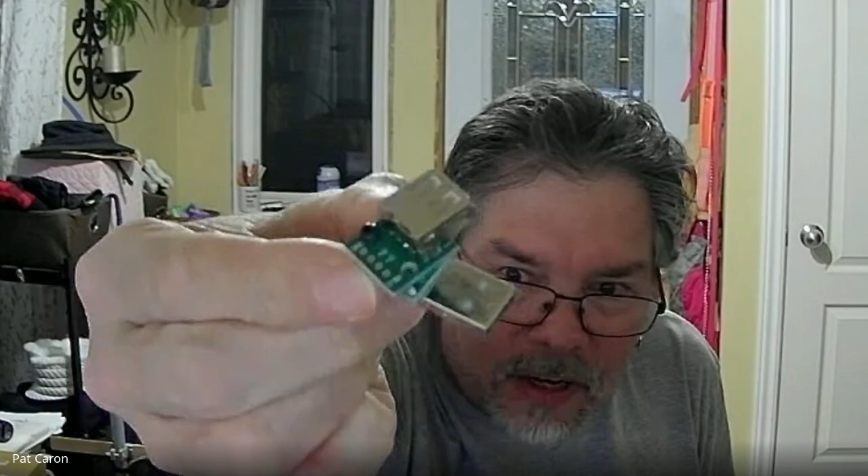So I bought a couple of these little USB boards, and that's what I was planning to use. So what are those, USB-Cs? No, those are USB A's. A male and a female. It was basically to connect the board, and I could power it from a separate 5-volt power supply. Basically you just take the ground and data connections, and then a separate 5-volt power to the female port, and power up whatever you wanted. That was my answer to the little Raspberry Pi hub.

Well, I did show you guys a while back the thing from AliExpress, which was a USB cable tester, only about $1.50. But the thing that was really good about it was it let you quickly separate your power-only cables from your power-data cables, especially when you start getting the little short cables that often come with accessories - most of them are just power cables.

You should be careful with those now, because you're going to order one and find out that your $1.50 board or cable tester is now going to be about $150 by the time duties and taxes or tariffs are added. Well, I'm afraid it'll go into customs and get stuck there because people won't figure out what it is or something. Anyway, but you can get them out - you can pay more and get them on Amazon if you know.

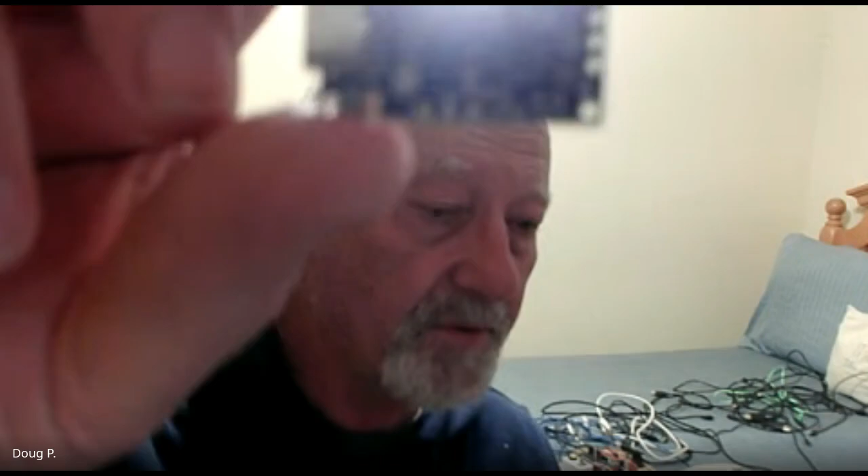I'll bet it's a lot slower, but out of curiosity I said, okay, I'll put it on my little charger. I'll have to look and see what it is, but this is what it looks like. Can you see anything there? Yeah, you're a little too close. Let me see if this helps. Yeah, you're still too close. Too close.

The thing I'm concerned about is it could potentially have the battery separate. You can see here there's a plus and minus, and there's 3 holes here. Now the problem is I thought that these two of these holes were tied to the battery. I don't know if you can see it at all, it's entirely out of focus. The idea would be you'd charge it up, and we'll see.

Do you have a part number for it? Doug said it had low voltage, but in my mind I couldn't figure out how they were doing that, so we'll see. If you have a part number, I'll put it to an Amazon page or something.

Unfortunately, it's on my other computer, which is in the other room. Okay, let me see, let me do this. I'll be able to do this. Oh, God.

They've made logging on to things so hard now. Oh, okay, let's see if we got worse. Oh no, I have to sign in.